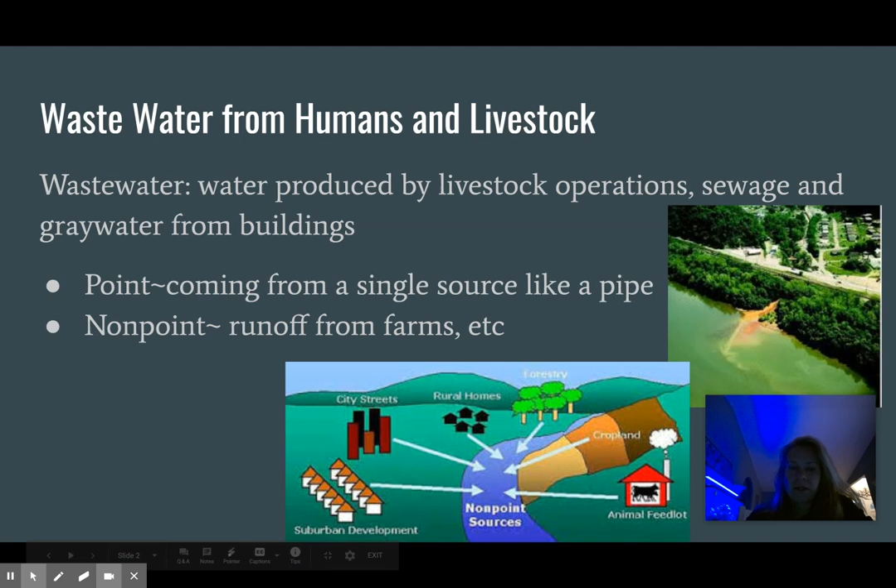So all of this runoff combined is a big deal. Maybe one on its own is not, but they're all using this land and all ultimately using this river. But no one is generally held responsible like they would be in this picture here. So once again, we come back to tragedy of the commons for that non-point source pollution.

All right, so environmentalists are concerned for three reasons. So, one, wastewater undergoes decomposition, so the things that are going into the water decompose, and they create a lot of demand for O2. So, as things are decomposing, a lot of oxygen is used, and if oxygen is used, that means there's less oxygen for living organisms like fish.

Also, nutrients are released. So if there's excess fertilizer going into the water, those nutrients are released and they can, in a sense, fertilize the water, and you can get algal blooms, which is really bad because at first you might think that's good. You've got all this algae growing. But what happens is once the fertilizer runs out, the algae dies. And when it dies, now you're back to number one, which is the decomposition. And so that takes a lot of oxygen out of the water and reduces it for the organisms that are there.

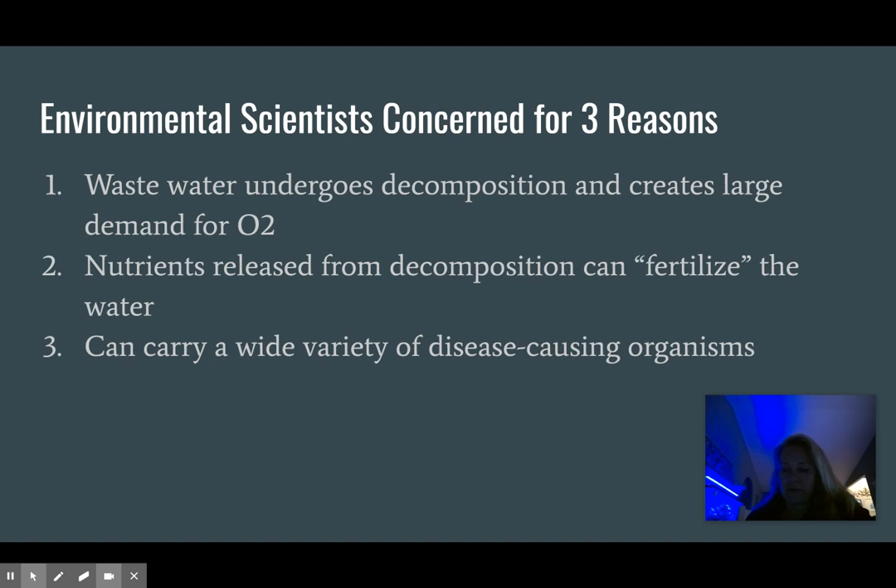And then three, it can carry a wide variety of disease-causing organisms. So, of course, there's Giardia, E. coli, all kinds of things that can be in the water because of runoff. All right, so our major pollutant source is wastewater. So that's the majority, and that could be from runoff from farmlands, or it could just be from sewage. So a variety of things: sewage, gray water, which is water that would be used for like your sink, washing dishes, laundry, that kind of stuff, and then livestock.

So basically, it uses oxygen. So as those things break down, oxygen's being used to break it down, so that decreases the amount of oxygen that's available for organisms. And so we refer to that as BOD, which is biochemical oxygen demand.

So on Monday and Tuesday, we'll do a lab about this. And so when you did the dissolved oxygen tablets, when you tested the water a couple weeks ago, I told you that we weren't going to do the BOD test. We will eventually do that when we go to the river. So we'll test the river and see what the biological oxygen demand would be for the river.

And so down at the bottom here, you can see a pristine river would be 1 milligram per liter. So hopefully the Sacramento River will be that. And then a polluted river is 2 to 8, treated sewage 20, and raw sewage is 200 to 600.

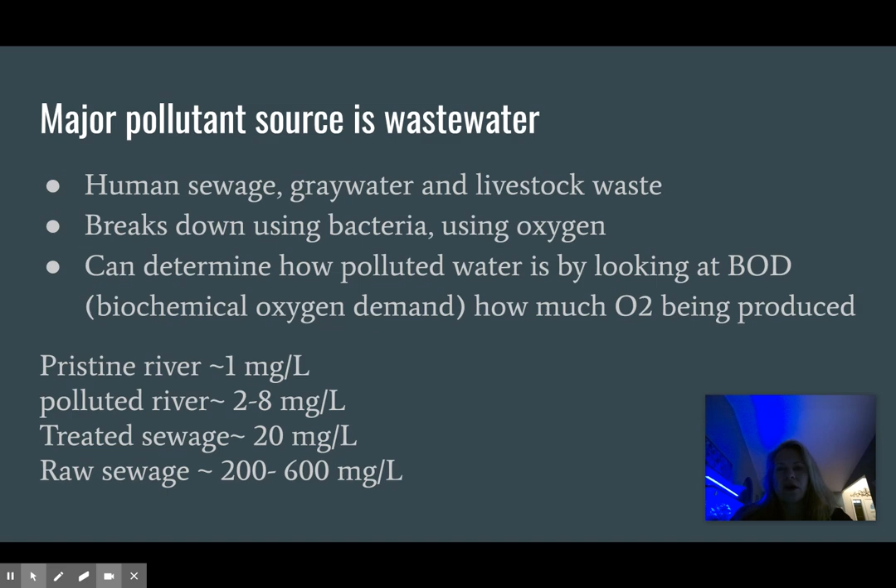So hoping that it's not that, but it shouldn't be. It should be within the pristine river. Maybe if we got down farther south, like if we were to get to Sacramento and test the water, we might see that maybe it's a little bit higher than it would be here because we're kind of at the start of the river. So I would expect it to be pretty pristine.

Also, what this can do when it's growing is, let's say that this is the ocean and you have corals or things that are attached to the bottom and they can't move. And so, if you've got algae blooming across the surface, it's blocking light for things that are below it. So that can be a problem for things that are attached, like plants or coral.

Fish can just move, but then eventually, when this starts to decay, it's going to decrease the amount of oxygen, and so the fish aren't going to be able to survive, and they'll have to move on, which is going to be difficult because it's probably their habitat. It's probably their ecosystem that they're having to abandon.

All right, so there's over 400 dead zones in the world, meaning that there's not really anything living because there's so much nutrient runoff into the water that really nothing is living except for the algae bloom, which is not good.

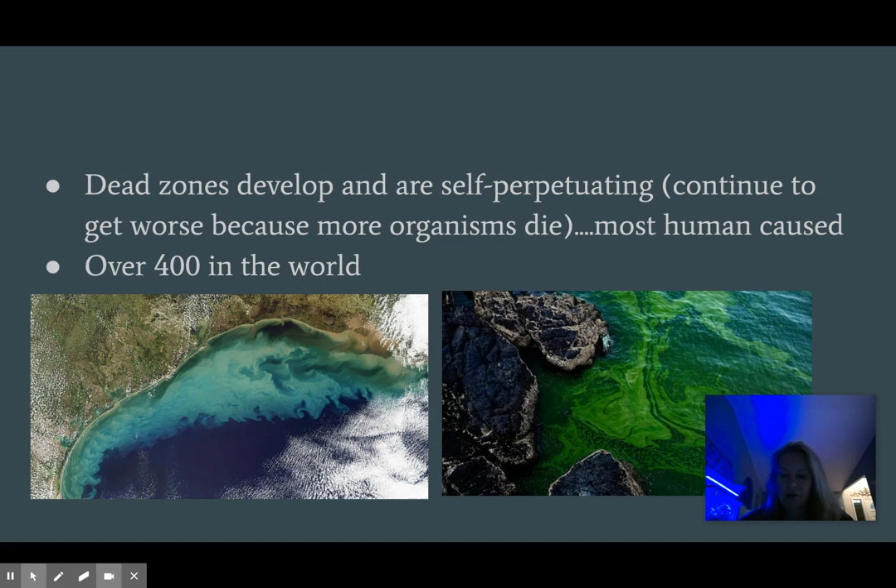All right, so we call that cultural eutrophication. So that is just anthropogenic, meaning that it's formed from humans. And eutrophication is excess nutrients. That's all that refers to. That term anthropogenic will pop up all the time on the AP test. And then eutrophication, you'll probably see that. And so that's just excess nutrient runoff.

And that's for pollution in the waterways, just an excess in nitrogen and phosphorus. And that's generally from runoff from farmland. So let's say that they're over fertilizing, that runs off into the river, and now we've got eutrophication, and that would be cultural, meaning that it's from humans. And that would cause the algal blooms, and then eventually things die as it decomposes and produces those dead zones.

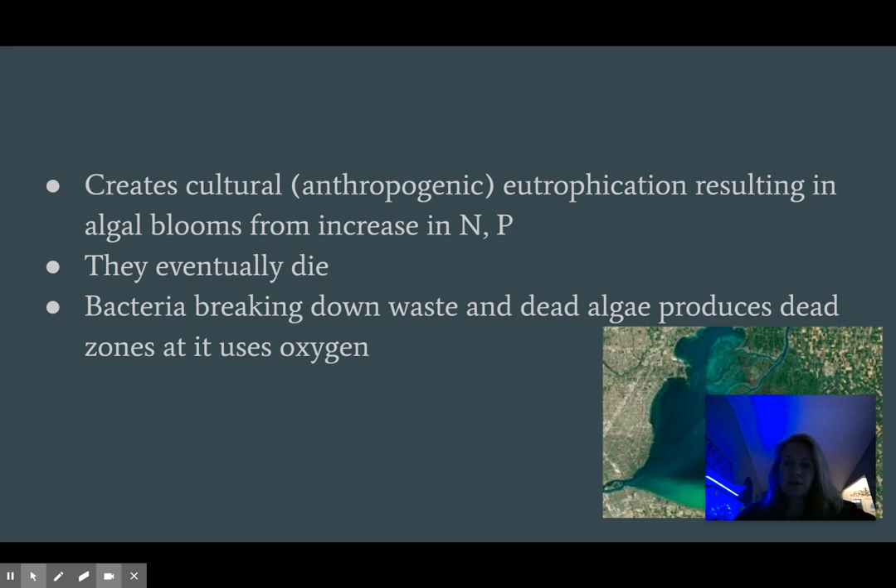Oh, and I'm blocking the picture down here. But you can see down here, there's runoff, and it's creating this algal bloom down here, which is not a good thing at all for this waterway.

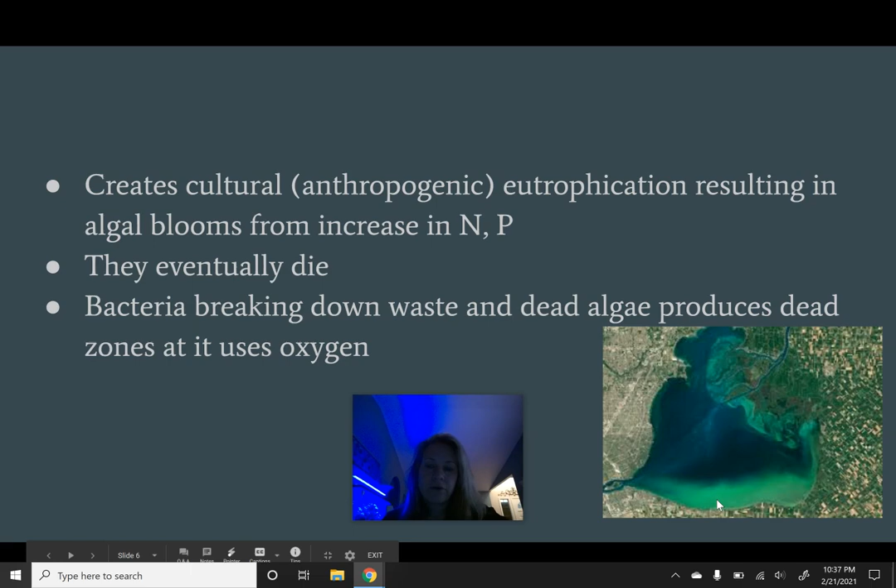All right, so let's see here. Let me move my little picture.

So 361,000 children die each year from poor drinking water. That's quite a bit. And a lot of it is due to E. coli. So cholera is very common, like I said, hepatitis. But E. coli causes excessive vomiting and dehydration. And so kids are more susceptible to that because they have smaller bodies, and they just don't deal well with being dehydrated and sick like that.

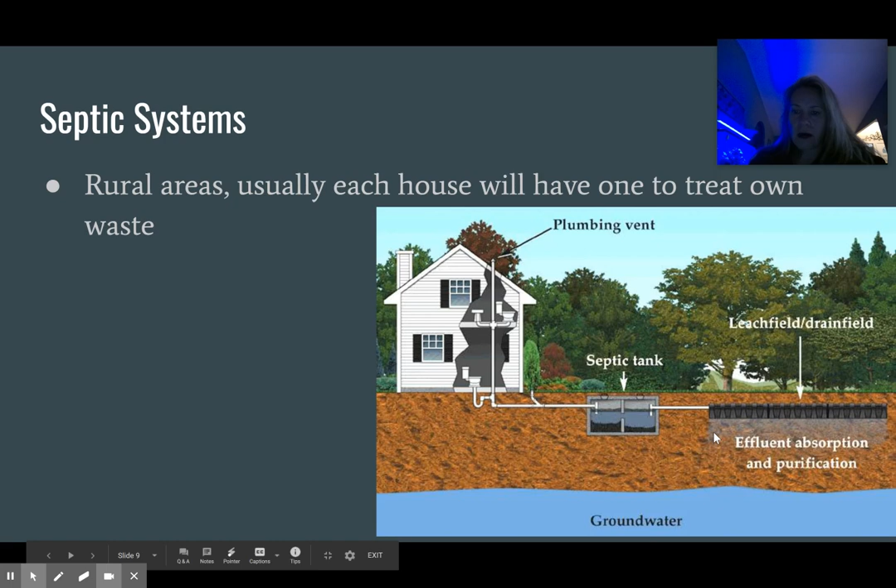But otherwise, this water is leached back into the soil below, where you are. So it's not like on the surface or anything. And then by the time it gets down into the groundwater, it has been filtrated. So the ground will naturally filtrate the water. All right. So advantages is that there's no electricity needed. You're able to take care of your own house in your rural area.

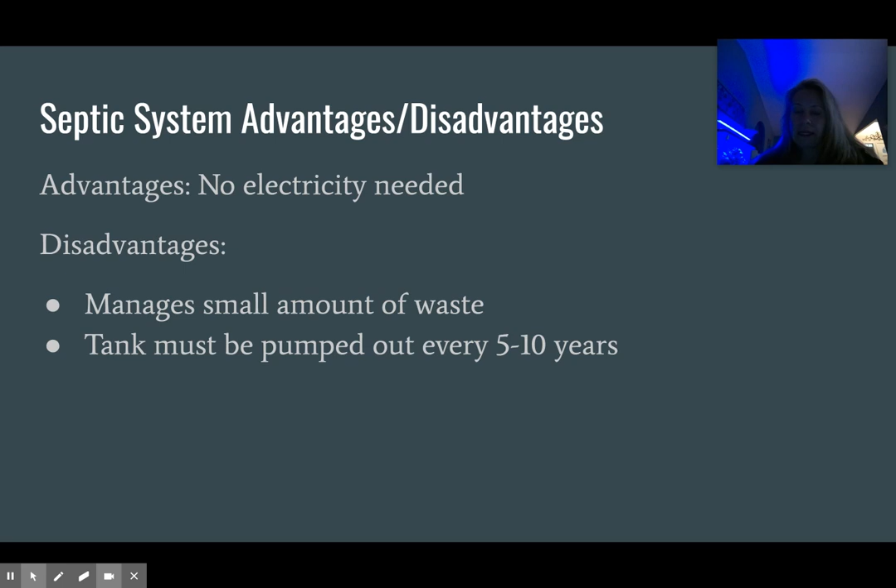Disadvantages, there's not a lot. I mean, you have to have a fairly large septic system if you have a fairly large house. And then you have to have the leach field and other things. It has to be pumped often, 5 to 10 years or so, and maintained. And so if there is a problem, it's very expensive to dig it up and take care of it. So there's advantages and disadvantages.

And then if we look at a sewage treatment plant, this video will show you a little bit how that works. The advantage is it takes care of a large city, so an urban area. And the sludge often is used as fertilizer. So that's a good advantage. Disadvantage is that they often use chlorine and things to treat the water. And so the water is being treated and it could contain chemicals and things.

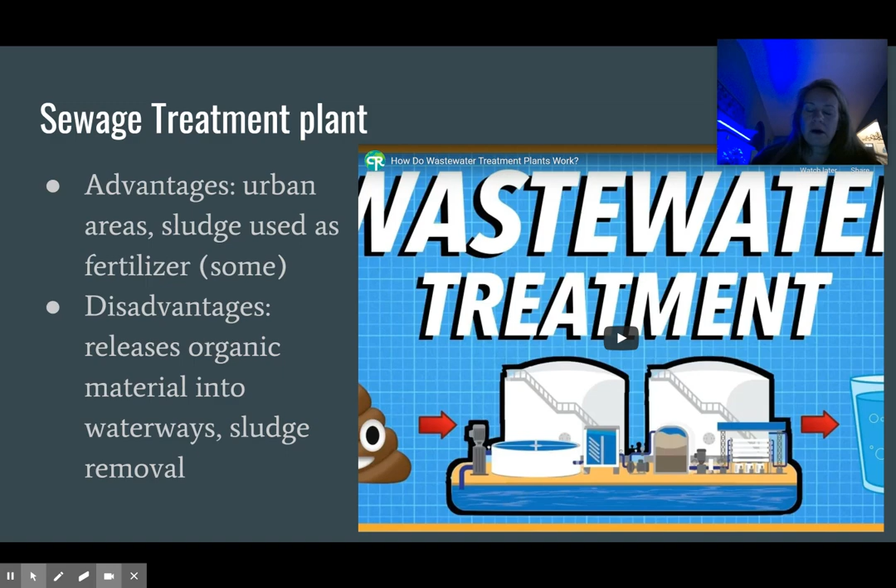Here in Redding at the Clear Creek plant, they are very, very careful because it goes right back into the river. And so they do test it. They treat it with chlorine, but then they treat it, and I can't remember what it is, with something that takes the chlorine out before it goes into the river. But there is a chance of contamination for sure, but they test it all the time. So anyways, here's how it works. I'll play a little video for you guys.

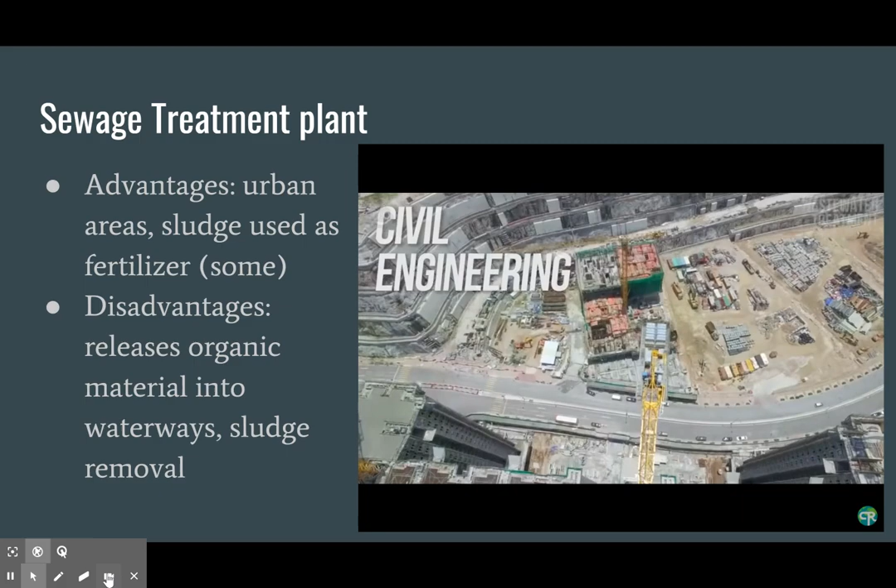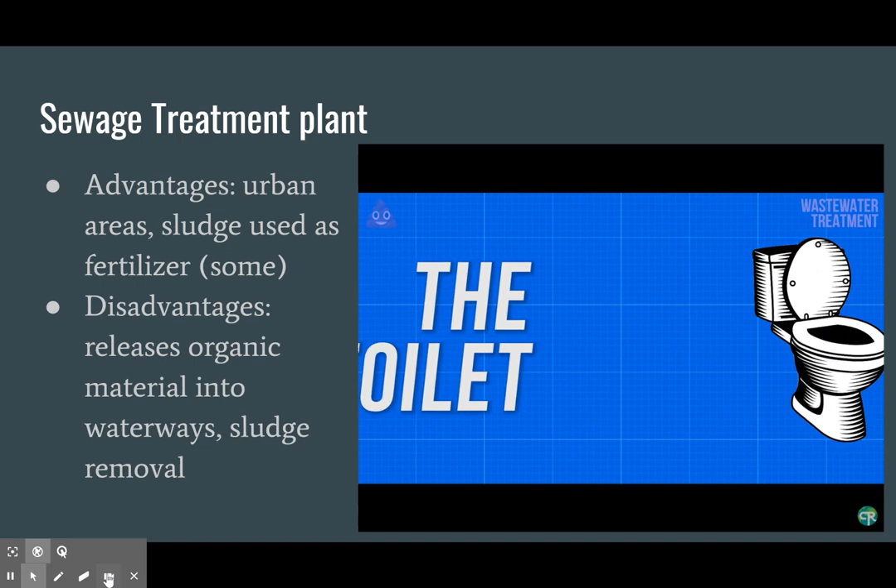It's a topic we'd rather not think about. Where does last night's dinner go when we flush it down the drain? While you may already be grossed out just thinking about it, this question leads way to a significant subset of civil engineering and a massive amount of public funding. Just like all dogs go to heaven, all drains in a city lead to a wastewater treatment plant where that wastewater gets turned back into water that we can drink. Now, you may be thinking that you'd rather just let bygones be bygones and not think about this nasty part of real life. But here's the thing. Chances are you've drunk water that was waste at some point, so you might want to take some time to understand this engineering process that makes dirty water clean. Here's where it starts. The toilet. Once you're done doing your business and flush that magical handle, your waste ends up at the inlet of one pretty interesting place, a wastewater treatment plant. Why is this place so interesting?

Because it takes arguably one of the most disgusting substances in the world and turns it back into something that is essential to all life.

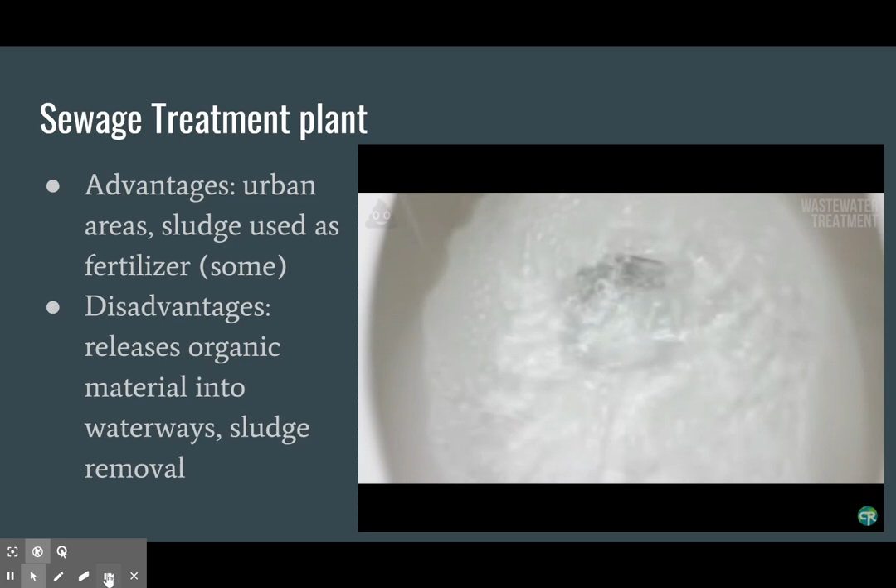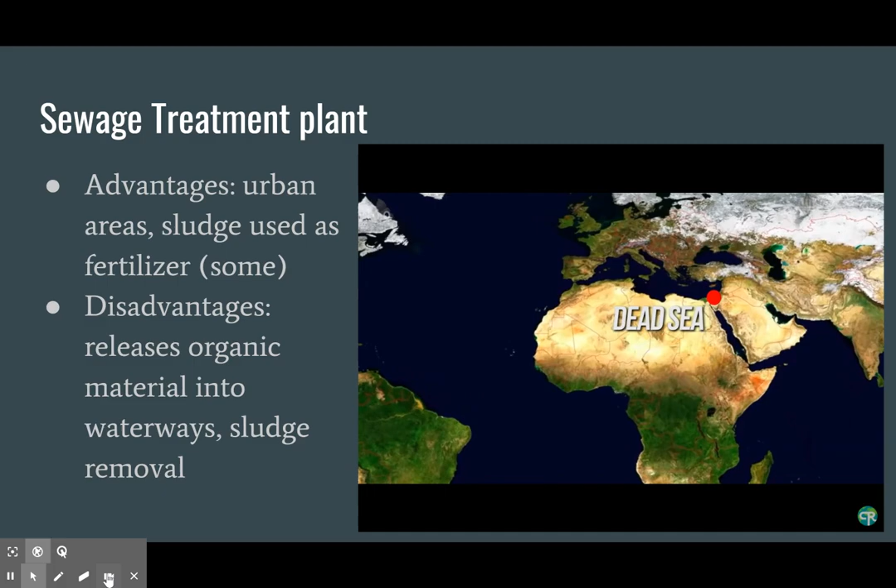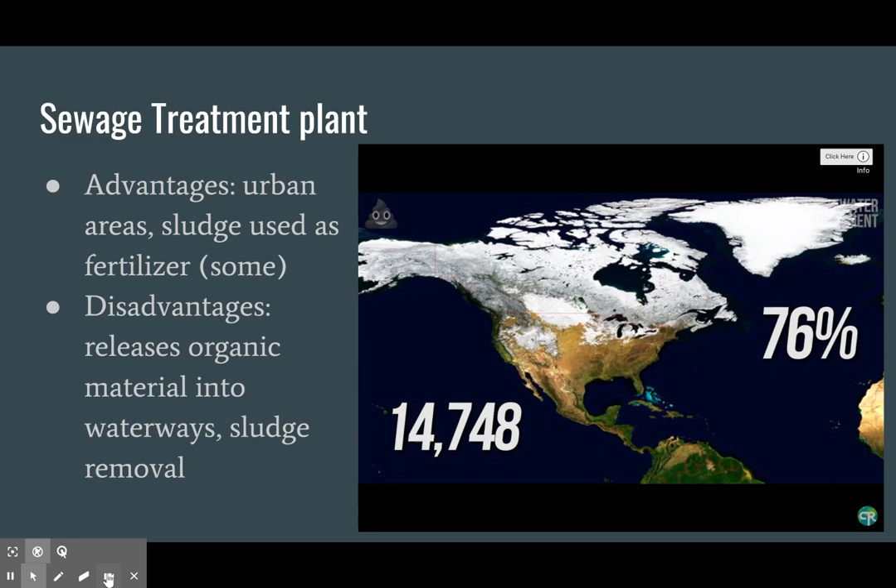There are an estimated 14,748 treatment plants in the US alone that 76% of the USA's population relies on, according to the American Society of Civil Engineers. Understanding wastewater is crucial to understanding the critical infrastructure needed to support modern life.

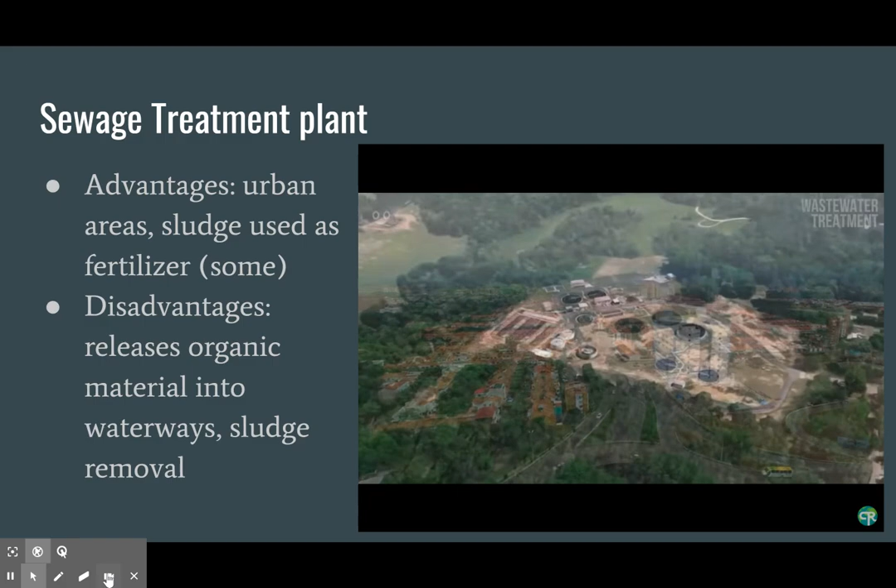That brings us to the first step of the process that handles larger items in sewage, things like flushable wipes, 2x4s, toys, or even guns. You name it, and it's probably been caught in a bar screen.

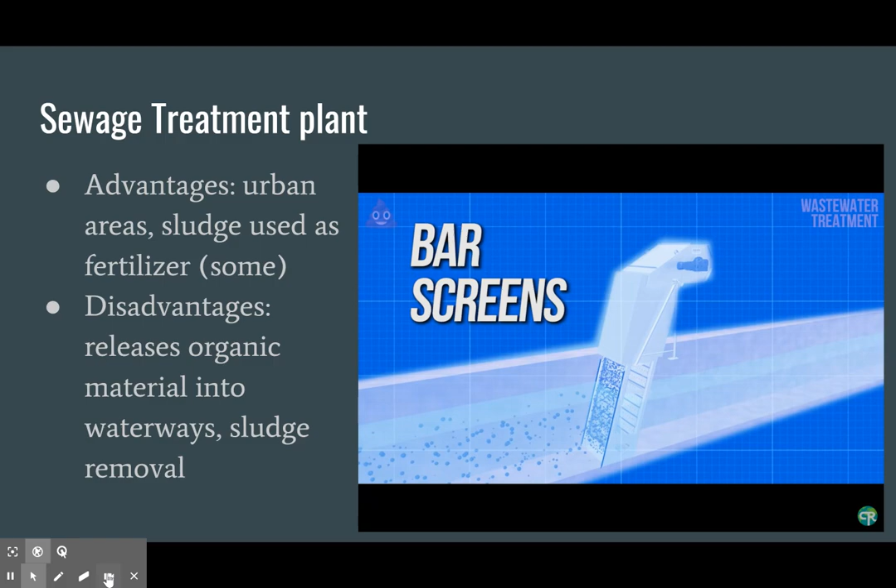Bar screens are exactly what you would think. They are large vertical bars that stand at the inlet of nearly every wastewater treatment plant, designed to stop larger items from getting to the plant and hurting machinery like pumps.

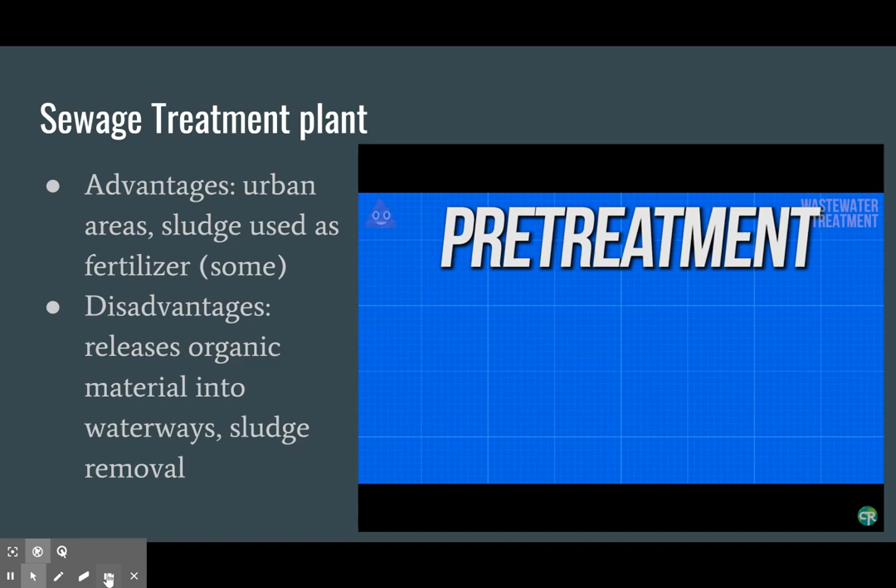This first process where bar screens are used is commonly referred to as pretreatment. The sole intention of pretreatment is to remove the outliers in the sewage and make the whole mixture a little more homogeneous, or slightly less chunky.

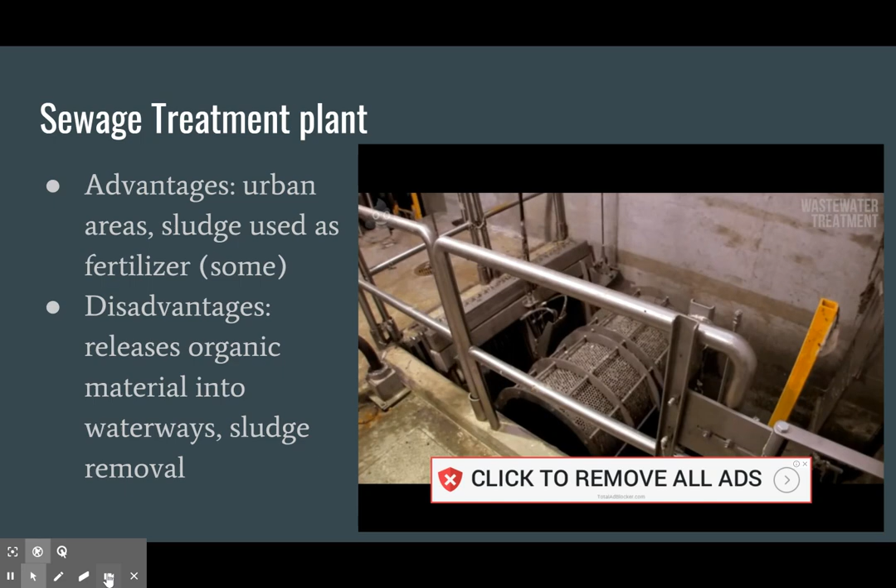Bar screens are typically mechanically raked at certain intervals, depending upon the flow rates of the water treatment plant, although some older plants will still have more manual removal processes.

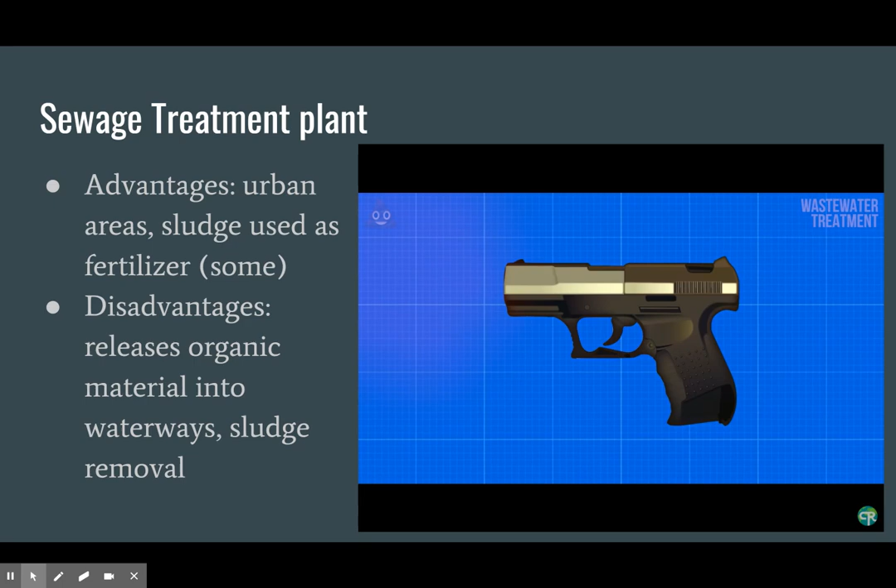Whatever is removed from the bar screens is then sent off to your average landfill or solid waste handling facility. Or, in the case of unusual items such as guns, they're sent off to the evidence locker in a police station to be investigated. Next up is the grit chamber.

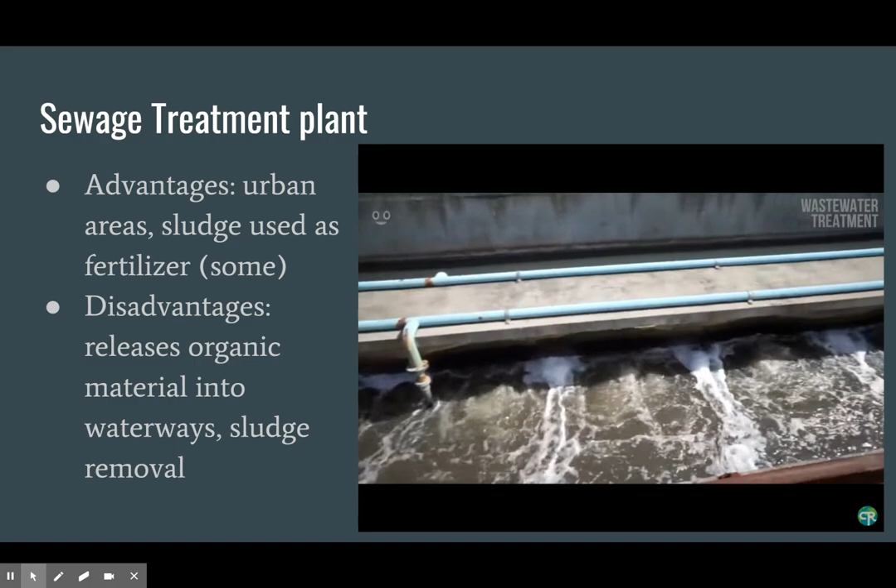Grit chambers are the next step in the pretreatment process following bar screens. Since these bars don't catch everything, larger particles called grit still need to be removed from the sewage as it is made even more homogeneous.

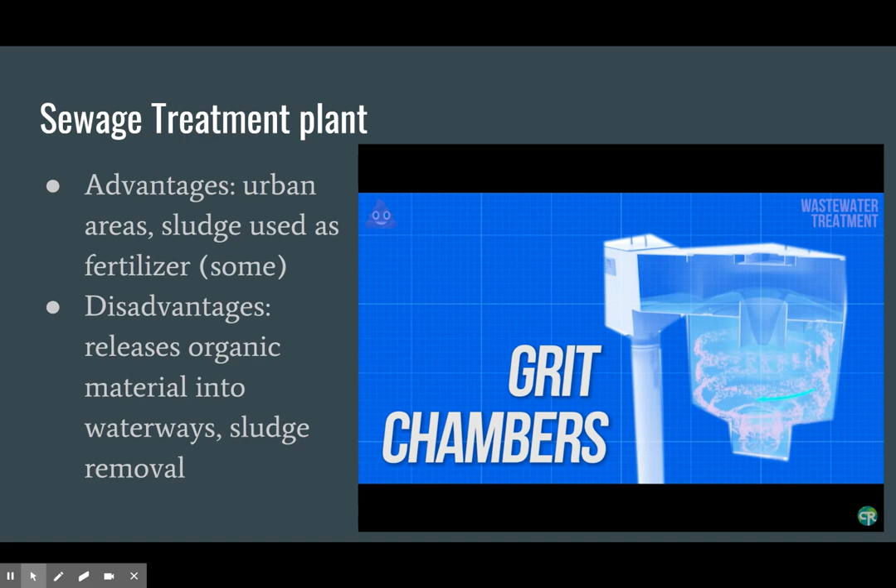As the sewage flows into the grit chamber, the velocity of the rather viscous sewage is adjusted to allow for particles of sand and rock to settle out. This is needed because these particles can't be removed using chemicals, and they could potentially clog or destroy pumps later on in the process.

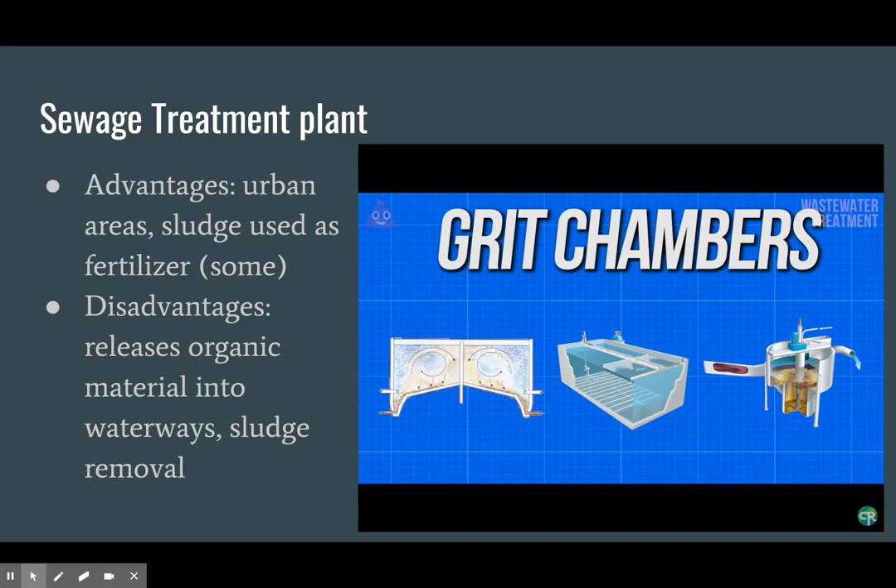There are 3 types of these chambers: horizontal grit chambers, aerated grit chambers, and vortex grit chambers, which all accomplish the same task using slightly different methods.

Following the grit chambers, the sewage will move on to the primary treatment process, which starts with a large basin called a primary clarifier. Primary clarifiers, and clarifiers in general, function on the principle of settling velocity. This term can be defined simply as the speed at which a particle settles.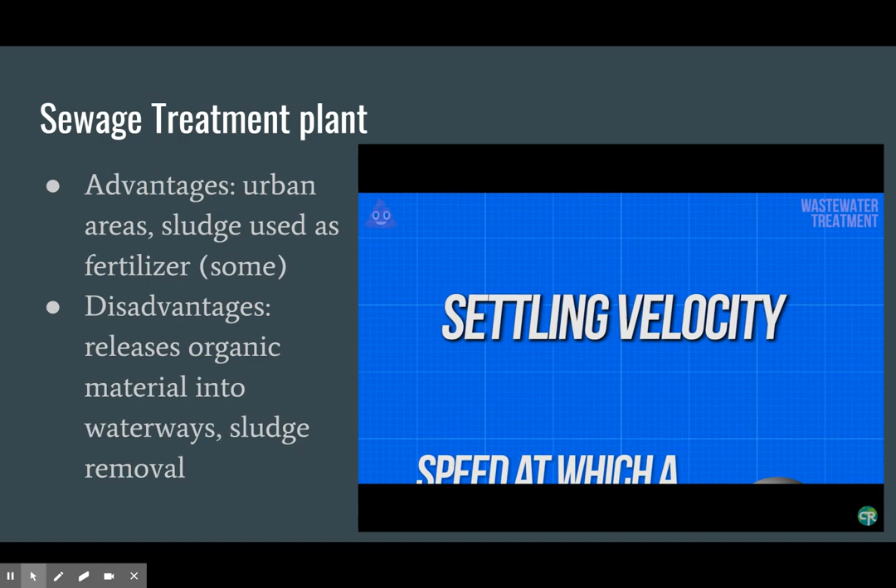For wastewater being pumped into clarifiers, it's important that the flow rate of the water being pumped in doesn't exceed the settling velocity of the particles trying to be removed.

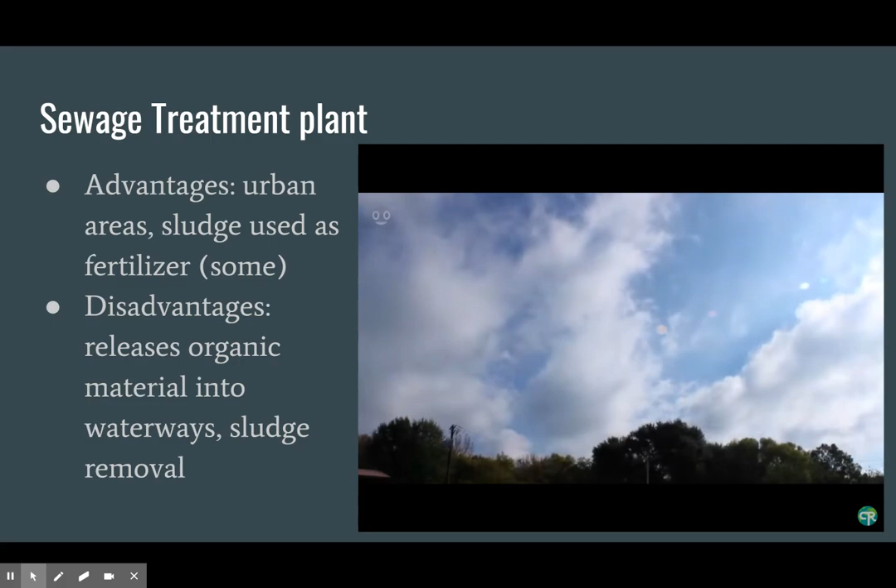In order to accomplish this, engineers will vary the size and number of primary clarifiers in accordance with the plant's permitted sewage flow rate. This ensures that at varying flow levels, solids can settle out of primary clarifiers in the correct quantities.

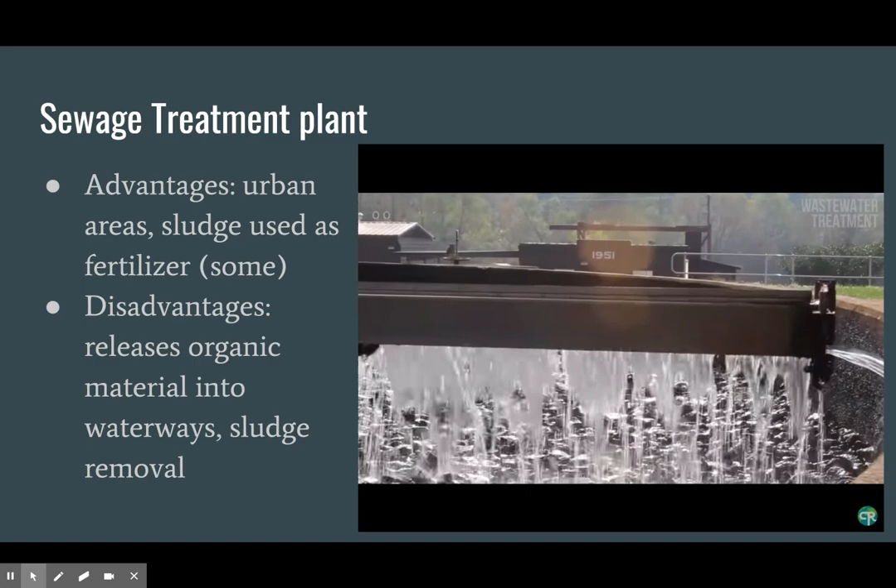The top layer of the clarified water flows over a weir wall and into the next basin in the process, called the aeration basin. Now begins the process of secondary treatment, the sole focus of which is to significantly degrade the biological content of the sewage.

In many cases, this process starts with aeration basins. Effluent flows into the aeration basins, at the bottom of which are hundreds, if not thousands, of tiny air blowers that create bubbles through the water.

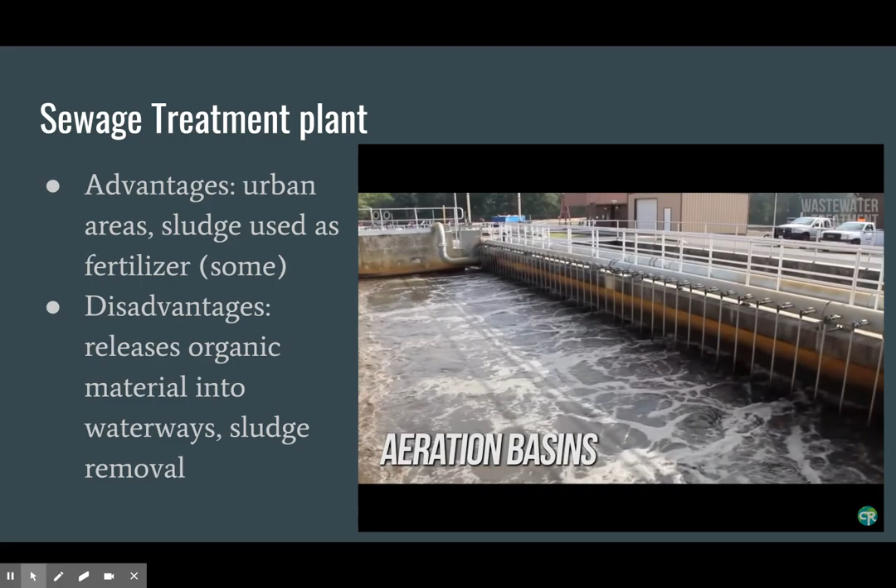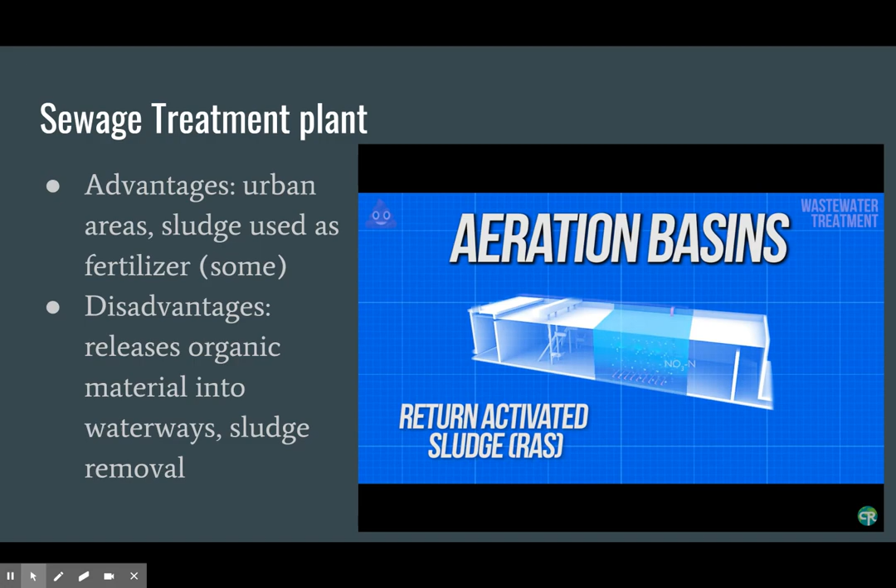The water is pumped into this tank along with something called return-activated sludge. You can think of return-activated sludge as a bunch of happy little bacteria that get to eat their favorite foods all day long. This introduction of significant amounts of bacteria along with the massive amounts of oxygen injected from the bubblers creates an environment perfect for the process of aerobic digestion.

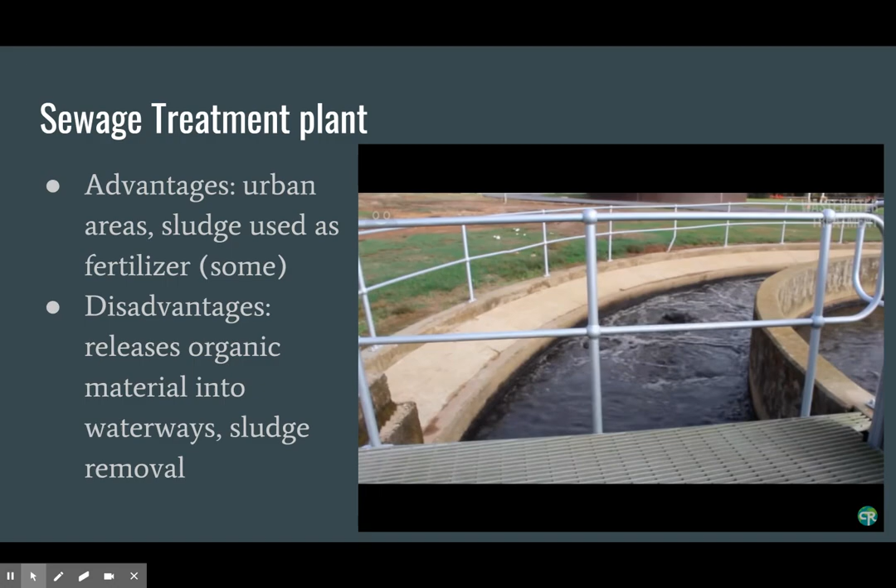Summarized simply, it's the breakdown of organic matter along with the use of excess oxygen.

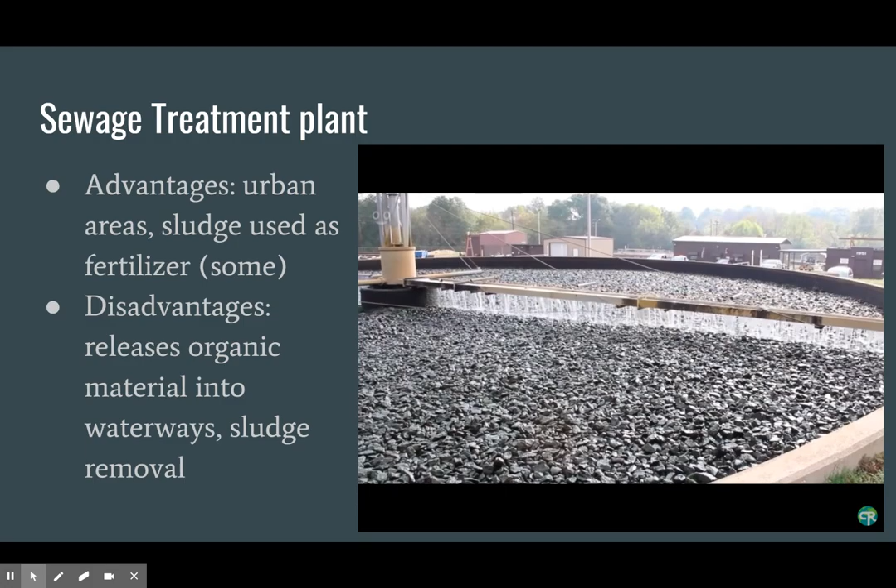Some older plants add in another step before aeration basins, referred to as biofilters or trickling filters. Found in many older plants, these filters trickle the effluent over a medium like stone or plastic, allowing a film of bacteria to consume organic matter in the water. This step is largely not used in newer plants due to more efficient modern processes, but plants with basins already installed often keep using them since they only benefit the treatment process in most cases.

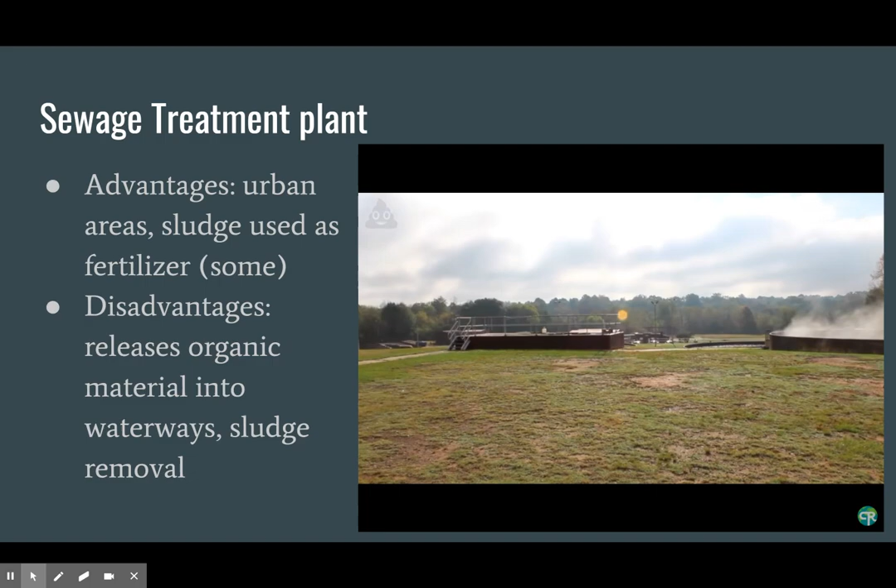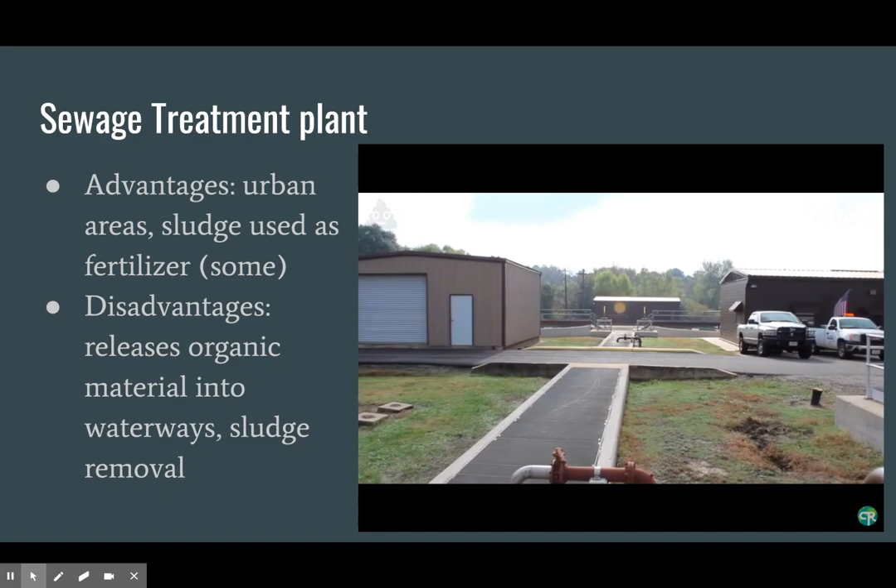Following aeration basins, the effluent along with much of the sludge is pumped into a secondary filter or clarifier, where some of the sludge is removed and pumped back into the aeration basins as return-activated sludge. Further settling of larger particles is also accomplished in these basins, as this is the final step that removes solids and larger biological matter.

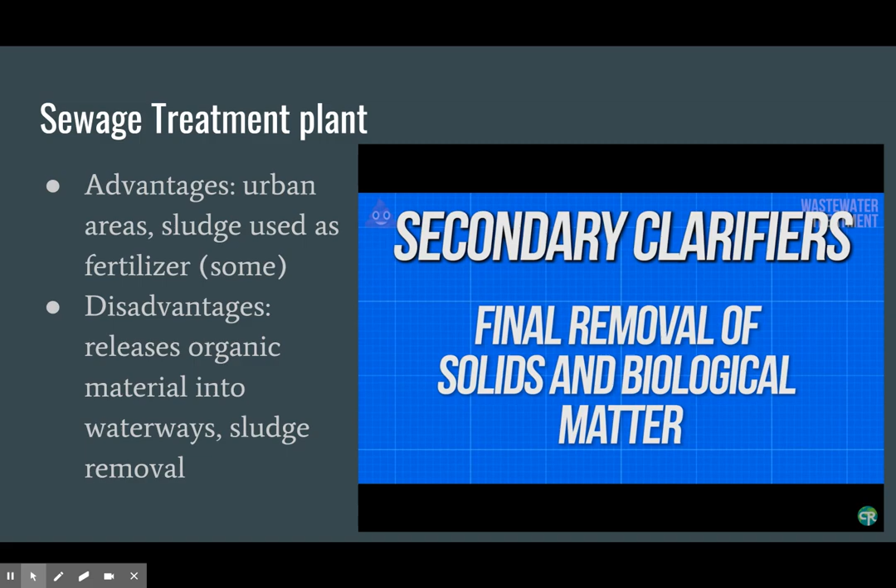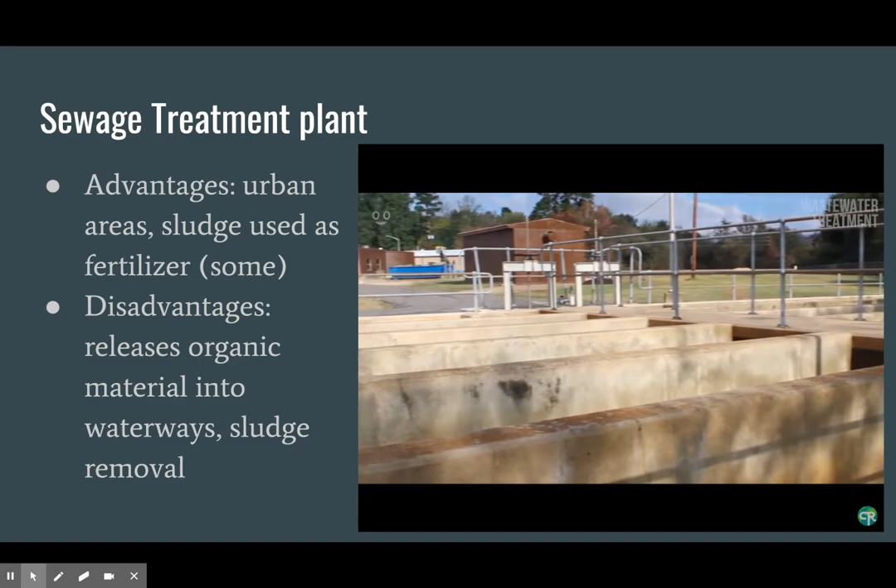Water flows out of secondary clarifiers over a nearly identical weir wall to the primary clarifiers and moves on to the disinfection process. At this point, 85% of all organic matter is removed from the water, and the effluent should be safe to drink in most cases, although you probably wouldn't want to.

Disinfection is the final step of the process and is usually accomplished in one of three ways: chlorine, ozone, or ultraviolet disinfection. Each process has its benefits and drawbacks, with each being used commonly throughout wastewater treatment across the world. Chlorine disinfects the water through chemical disinfection.

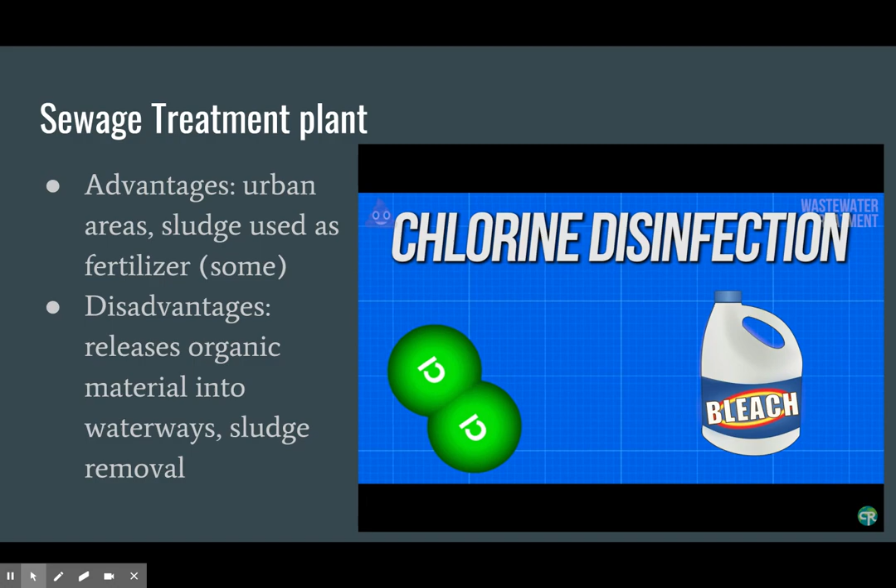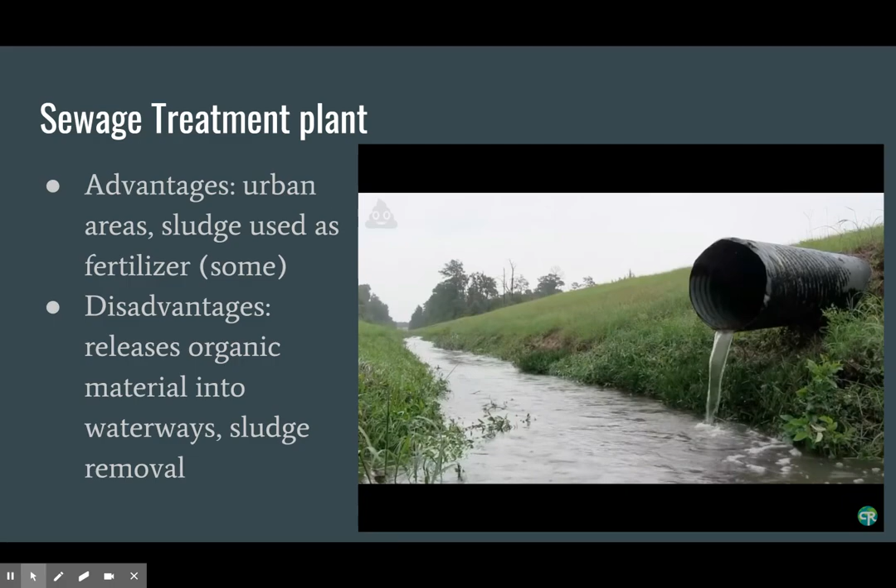Chlorine, which you can think of as concentrated bleach, is added to the effluent to kill off any remaining bacteria and organisms still living in the water. When chlorine is added to kill off the bacteria, it then has to be removed before it can be discharged, so as not to kill off anything in the discharge location. After this, the water is safe enough to discharge into a stream or lake.

Ozone disinfection is another method that involves pumping an electrical current through the water, causing oxygen molecules, O2, to disassociate and combine with a free oxygen atom, forming O3, known as ozone. Ozone is an incredibly strong oxidant and causes microbes' cell walls to leak, rapid cell decomposition, and overall damage to cells. In other words, it kills off bacteria.

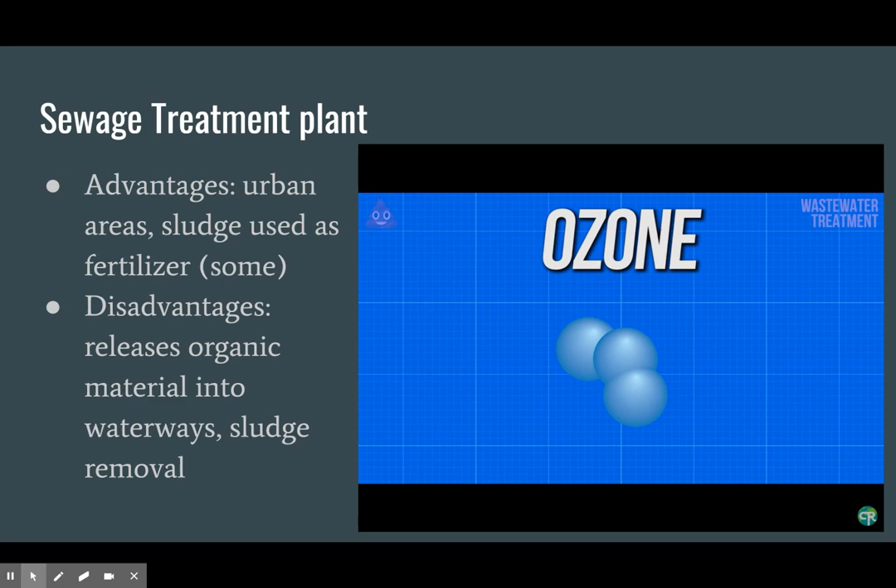The last common method uses ultraviolet light to scramble bacteria's DNA so they cannot multiply. In UV disinfection, the bacteria in the water aren't killed, rather they're sterilized, rendering them harmless. If you were to ingest water with living microbes immediately following UV treatment, any harmful bacteria would be unable to multiply or cause damage to your body.

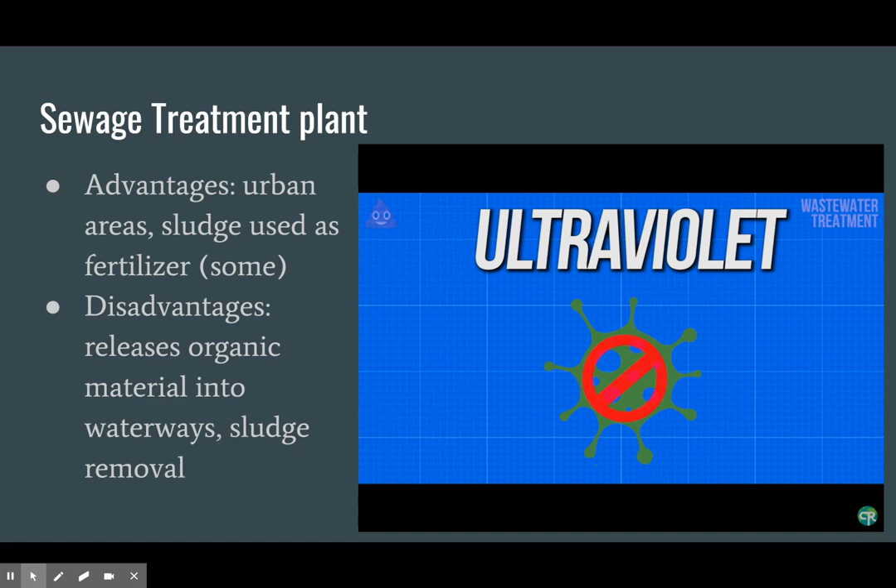Engineers choose between these methods based on a variety of factors such as flow rates, cost, and location of discharge, which brings us to the final step: effluent release.

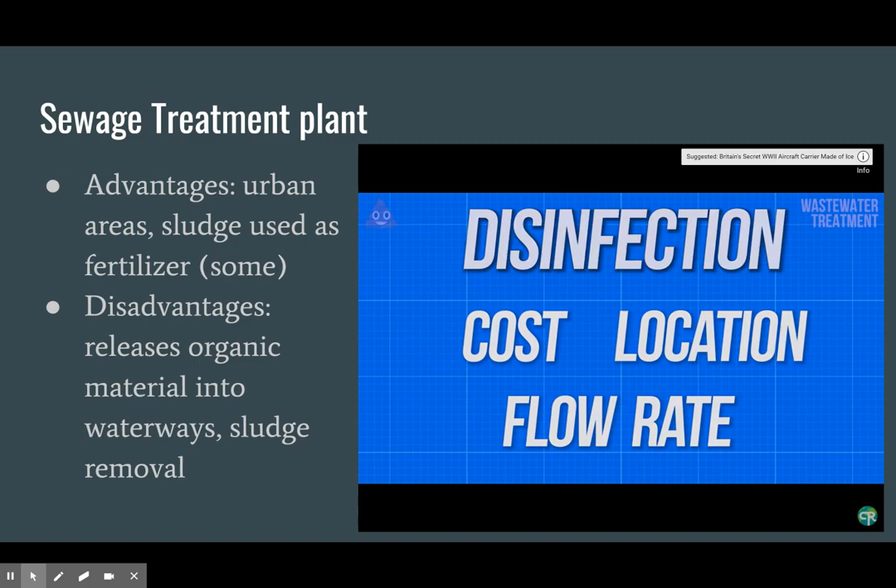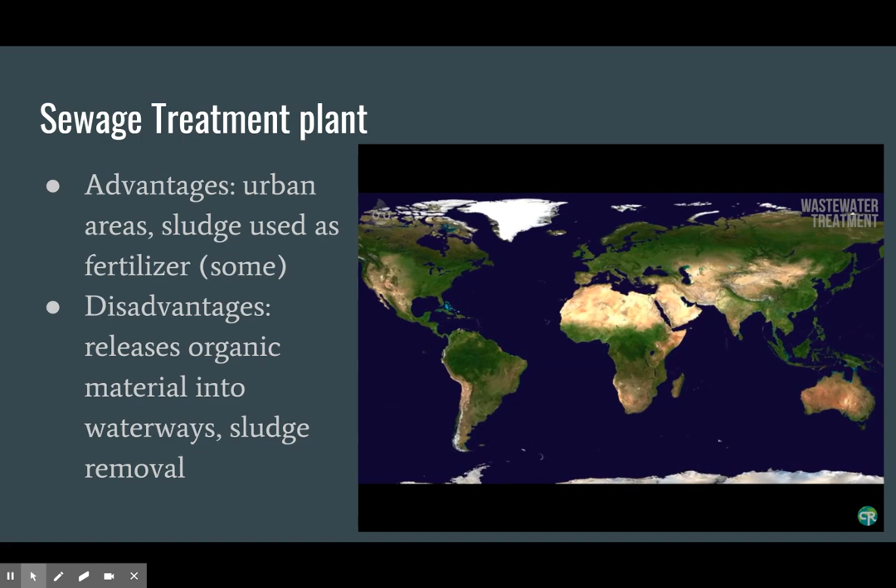Effluent release exists in one of two forms. In most cases, the now treated water is released back into a stream, lake, or other water source. In rare cases, usually in areas where water is scarce, the effluent discharge from a wastewater treatment plant can be discharged into another treatment plant directly, where it will be treated further for consumption. This is referred to as full-cycle water reuse.

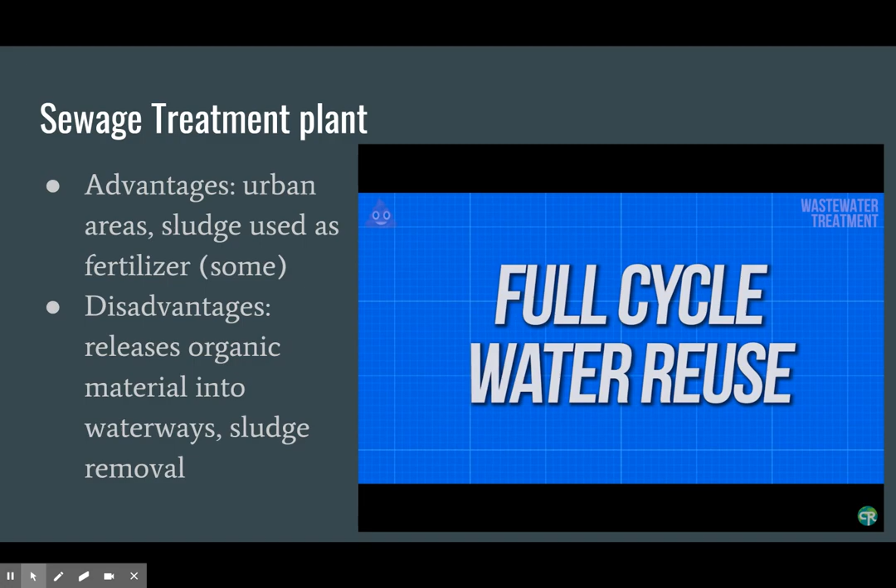From a chemical perspective, the final drinking water is the same as normal treated water that flows through your pipes now, but due to the connotation of your drinking water being sewage just days before, this treatment process is normally shied away from or not heavily publicized.

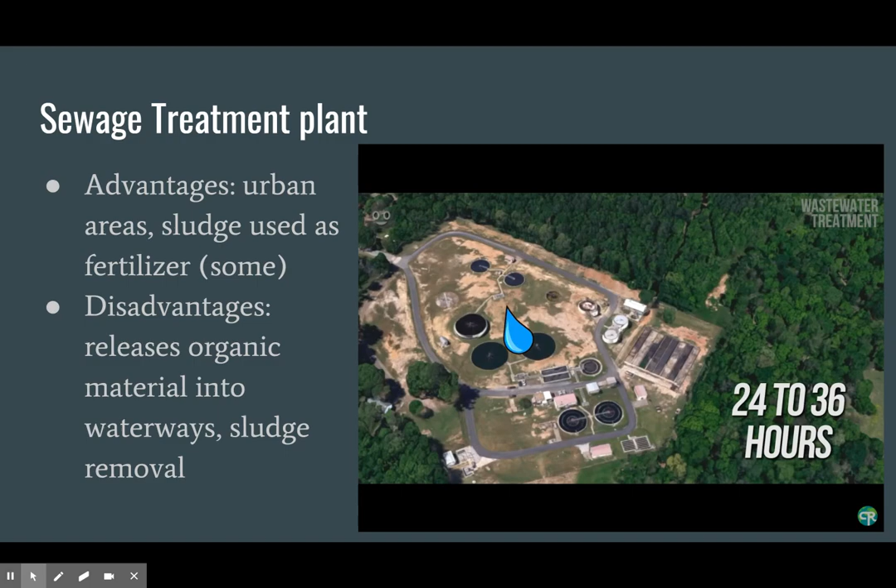The entire process of wastewater treatment takes on average 24 to 36 hours from when a drop of water enters to when it leaves. Each wastewater plant will receive a permit for flow rates, chemical levels, and effluent quality, among other things, from the EPA, outlining the necessary treatment for a plant.

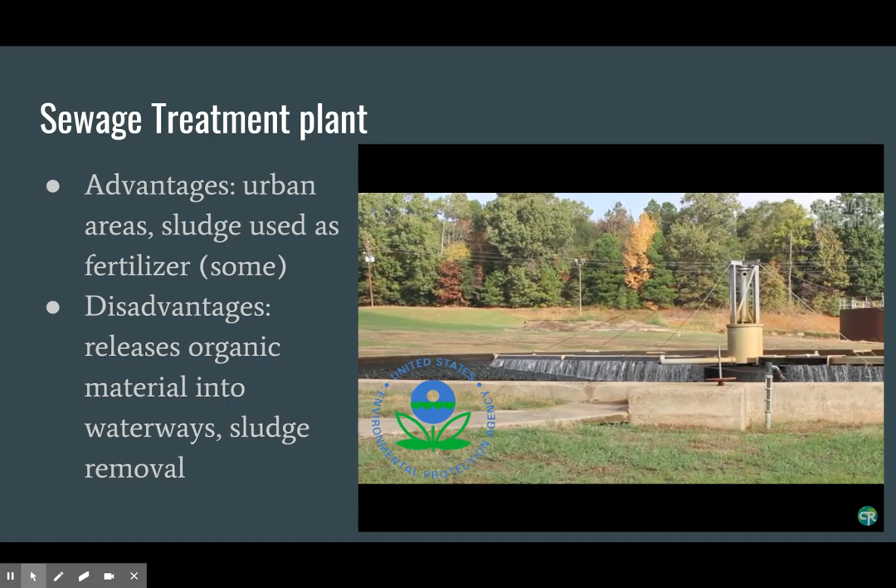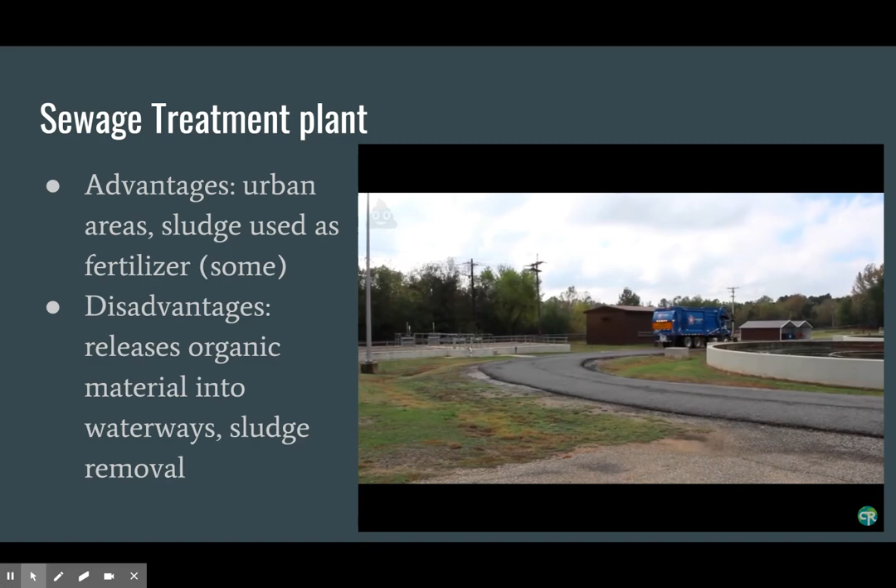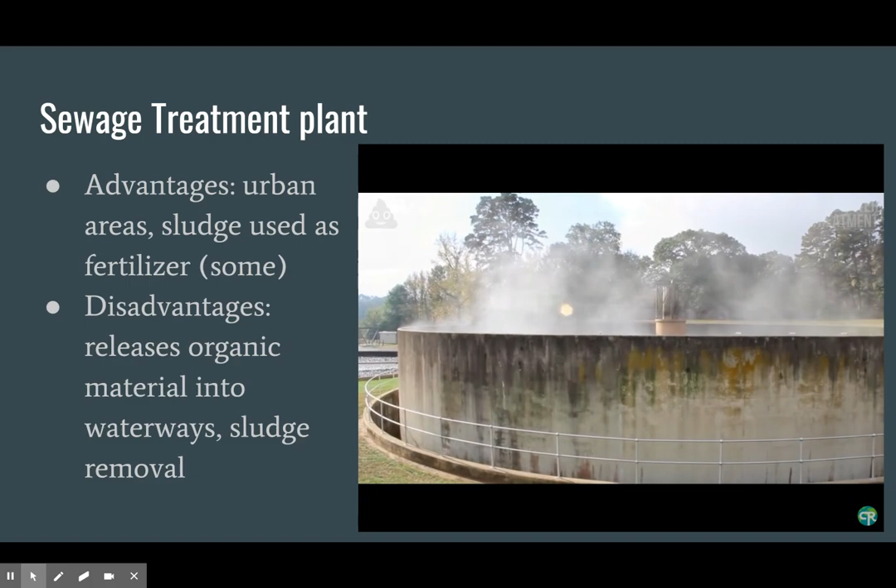Wastewater plant operators make adjustments to a plant's operation and constantly measure levels to ensure proper discharge and proper treatment. Without these operators and the dirty job they do around the clock, our sewage would always stay sewage, and sanitation in modern cities would be much, much worse. Wastewater treatment is an essential dirty job, and you can thank the 14,748 treatment plants in the US alone for not having to worry about what happens when you flush.